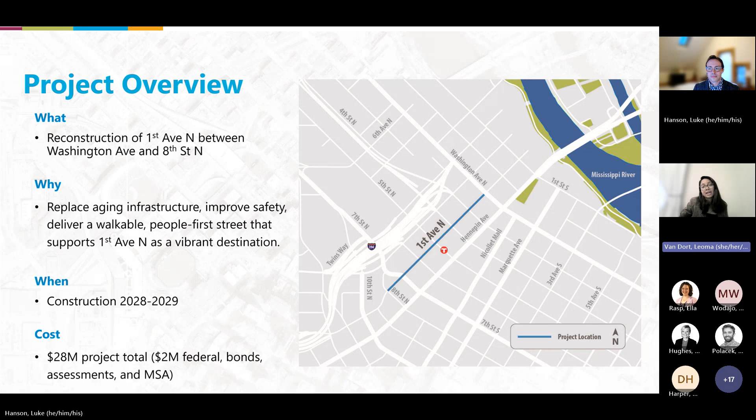Currently, the project is slated for construction in 2028 and 2029. The total project cost is $28 million that will be funded by a $2 million federal grant. This grant is for improving pedestrian facilities along First Avenue. Additionally, we will also use bonds, special assessments, and municipal state aid funds to cover the remaining cost of the project.

Today we are sharing our preferred layout with all of you ahead of bringing it to City Council for layout approval early next year. This brings us to the next step of more detailed final design that will happen all of next year through 2027. And then construction will begin in 2028 and 2029.

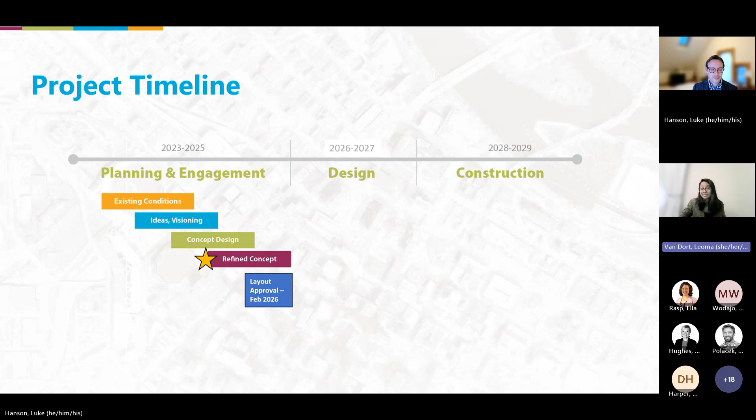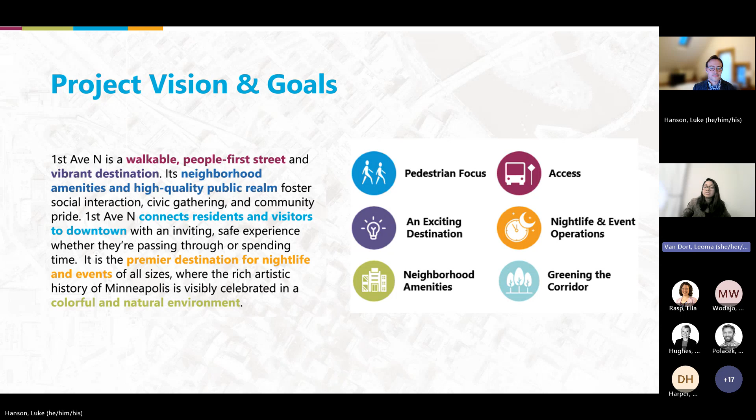In our first round of engagement, we asked the public and our stakeholders about their experience on First Avenue today and what their vision was for a future First Avenue. The feedback we received was essentially what we developed into our project goals and vision, which includes a pedestrian-focused street with amenities for people walking and rolling, a street that provides people access to many destinations on First Avenue, greening and pedestrian-friendly features, and a street that is able to support nightlife and event operations that ultimately enhance the neighborhood identity.

As I previously mentioned, we've done public engagement for nearly 2 years. We talked to people on the street, did walking tours with different groups to identify existing challenges, and talked with safety and traffic personnel to understand operational needs on the corridor. We also gathered input at open houses and online surveys, and had targeted one-on-one conversations with property and business owners along the corridor. Throughout the project, we received valuable input that ultimately informed our recommended design.

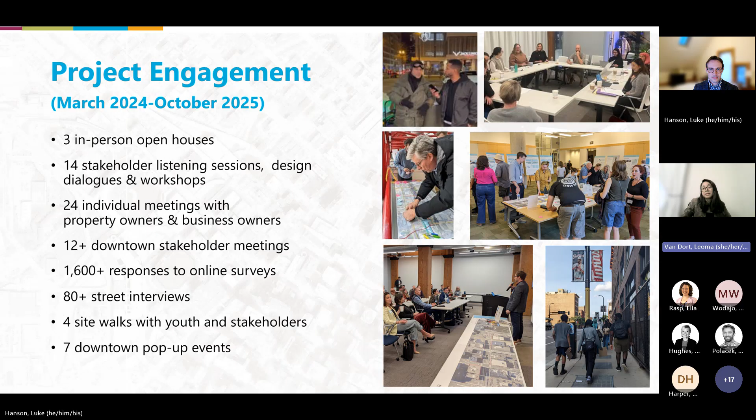The technical work we did went hand in hand with engagement over the 2 years. We looked at things like trees along the corridor, utilities and encroachments, and constraints for greening and stormwater infrastructure. We also identified where areaways were located—areaways are basically basements of buildings that extend into the right-of-way under the sidewalks. We learned that there are, in fact, many areaways on First Avenue.

In addition to all of this, we also went out on event nights to observe traffic operations, things like where passenger pickup and drop-off happens and how pedestrians use the street.

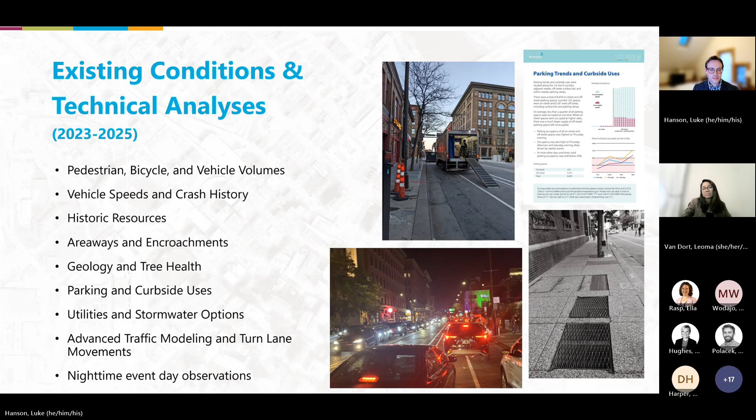All of these options aligned with city policies and plans. They incorporated operational considerations and technical analysis, and were directly informed by previous engagement. All of these options also include wider sidewalks than today, and support temporary closures for activation and events.

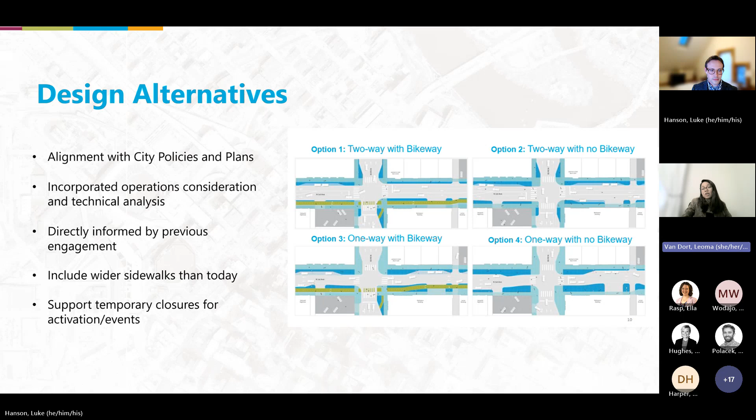I'll very quickly summarize what we heard from that 3rd phase of engagement before turning this over to Luke. From the online survey, we heard more support for the options with a bikeway. In in-person conversations, we heard mixed feedback on the options with the bikeway, and we also heard a preference for one-way. Generally, however, we did not hear a strong consensus on whether a two-way or one-way option would best serve the project goals.

What we heard at the end of phase 3 was pretty consistent with what we had heard from previous engagement as well, which was that space for pedestrian and business activities—like wider sidewalks, space for loading, drop-off, parking, outdoor dining, and greening—were top priorities.

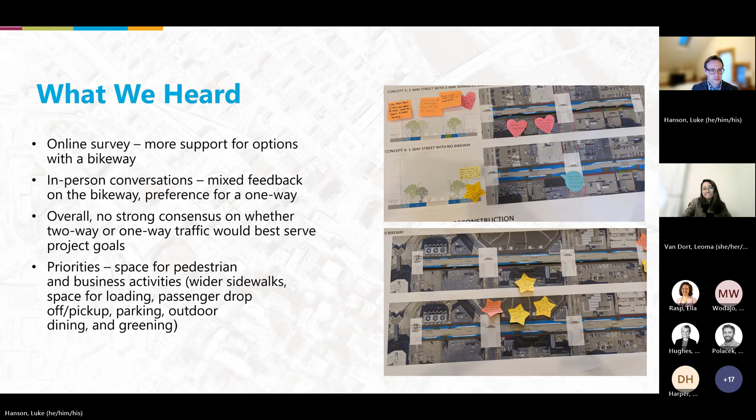So if you'd like to take a deep dive into all of the engagement feedback we've heard to date, we have our engagement summaries available on the project webpage.

And with that, I'm going to turn it over to Luke, who will walk us through some key considerations that have informed the recommended design.

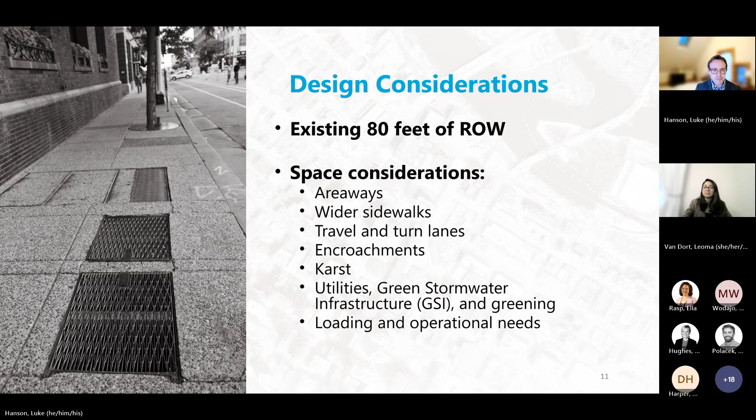Back in phase 3, when we last engaged in summer, we explored, as Leoma noted, both one-way and two-way options for the street. At a high level, part of the thinking here was not to turn First Avenue into a one-way.

That was never a design goal or objective of the project. Instead, we explored one-way options because they didn't require as many turn lanes as a two-way street. As a result, that afforded some more space behind the curb that we could potentially appropriate for other goals and objectives we were trying to accomplish with the redesign of First Avenue.

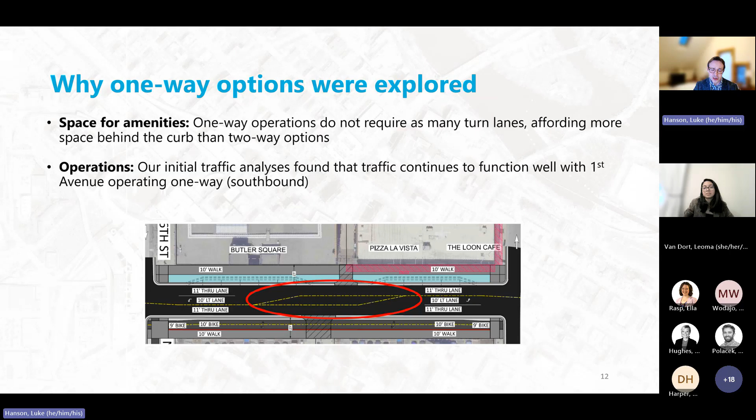And then at a really high level, we did do a traffic analysis that showed both one and two-way operations tend to function well on First.

So as we weighed those considerations in phase 3, we reviewed the feedback we received as a project team and then performed some additional technical analysis to really tease out the impact of a one versus two-way roadway for motorized traffic on First. I'll quickly summarize some key findings that were informative in terms of our ultimate thinking and recommendation for the corridor.

As I noted before, from an operational perspective, both one and two-way streets operate well, and that's not necessarily surprising. First used to operate as a one-way street, so it stands to reason that it could function again.

However, once we took a deeper dive and did some additional traffic analysis by converting First to a one-way street - as a recap, that would be a two-lane southbound one-way street - we found that approximately 100 to 200 vehicles per hour would be diverted northbound onto Hennepin.

That was a key consideration because, as we well appreciate, while our project limits are First Avenue from Washington to 8th and 9th Street on the south, First Avenue exists in a downtown network of streets and doesn't exist in a vacuum. Core to that consideration too was that diversion onto Hennepin, both in terms of traffic on the street, but also in terms of its ability to potentially impact northbound transit service. So those were key considerations.

Additionally, at a high level, we weighed and vetted some of the safety options of both one and two-way streets. Broadly speaking, one-way streets sometimes have the potential for higher speeds or merging conflicts - those merging conflicts particularly where a car wants to merge from one lane to an adjacent lane, usually to complete a turn. Whereas sometimes the friction of a two-way street can help keep traffic speeds lower. Again, these are design and context specific, but at a high level, those were considerations we weighed as a project team with respect to safety.

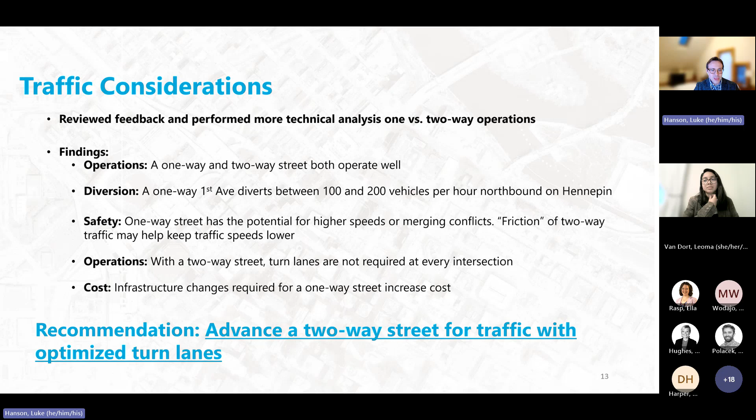Ultimately, as we sat and synthesized the feedback and technical analysis as a project team, we came to the recommendation of advancing a two-way street for motorized traffic on First Avenue, with the thinking being that we can optimize turn lanes. And I think it's important to note, what does that mean?

That means essentially, based on our traffic analysis and safety considerations, there are locations where we do not need to maintain dedicated turn lanes at every intersection. The benefit there within being we are able to then appropriate that space behind the curb for additional pedestrian amenities, space, and other goals and objectives of the project.

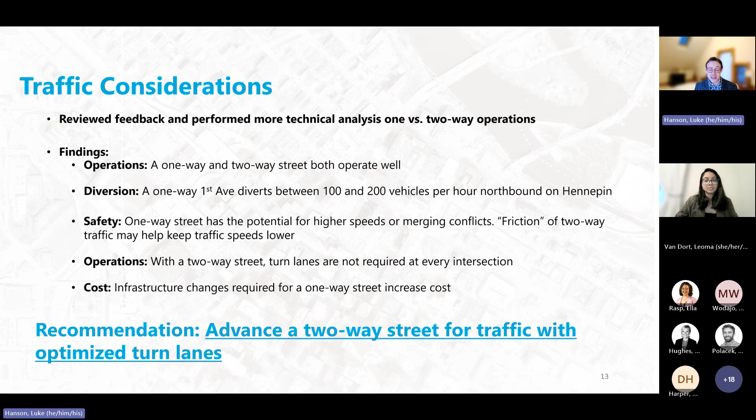Similarly, going back to our phase 3 engagement that we last interfaced with in summer of this year, we also considered options both with and without bikeways. At a really high level, just recapping years of engagement here, that is largely a function of having mixed results depending on who we were talking to through phases 1, 2, and 3 of engagement. Also at a high level, bikeways obviously take up space in the corridor, so there are impacts to what we're able to fit within the corridor, but then also there are existing bike facilities on First today.

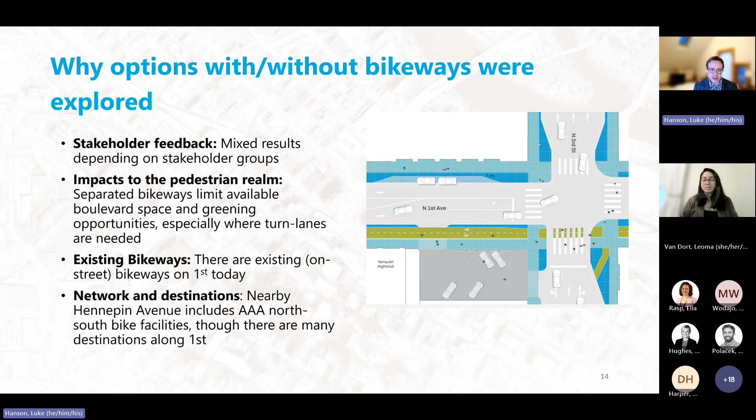Part of that consideration was, just like traffic, how are bikeways considered within the overall downtown network of existing and proposed facilities. As we took a closer look, we considered not just First Avenue's traffic implications, but how it sits in our connected and planned bikeway network, recognizing we have a parallel all ages and abilities bike facility on Hennepin Avenue that was installed when that street was recently reconstructed in both phases.

As we look at bike facilities or connectivity to First, we also have intersecting bikeways at 10th and 9th Street, which are soon to be improved with a federal project to make those safer, more comfortable, all ages and abilities facilities. There are also bike facilities that intersect First on 6th, 4th, 3rd, and Washington. Looking at our planned network over time, we have the vision of connecting every intersecting street within project limits to First Avenue with bike facilities.

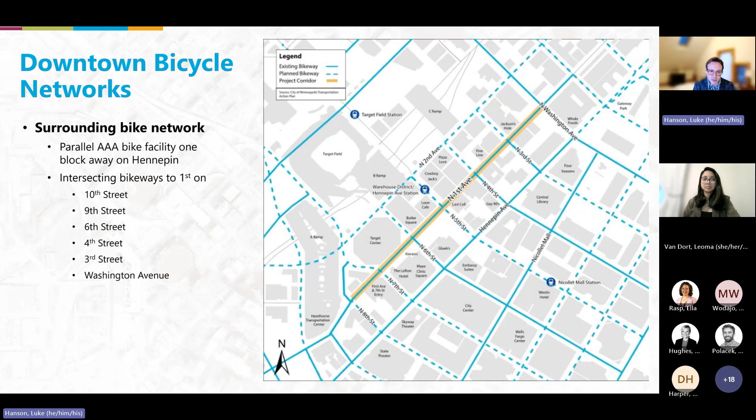Similar to our traffic considerations, following the completion of phase 3 engagement, we reviewed feedback and then explored design options both with and without bikeways to really assess how they best meet project goals on the corridor. At a high level, one-way protected bikeways on both sides of the street were not advanced, largely because they take up more space than a two-way bike facility and proved quite impactful. As a result, we did explore a two-way sidewalk level bikeway on the east, the not-Target-Center side of First Avenue within project limits.

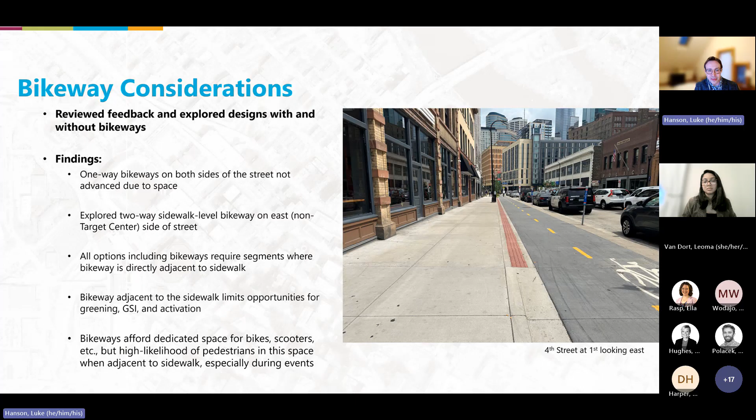An additional consideration is that bikeways afford dedicated space for bikes, scooters, and micromobility to operate, which is a good thing. That said, there's also a high likelihood of pedestrians inhabiting this space, especially where that bikeway is directly adjacent to the sidewalk, similar to this image of 4th. I think that is also amplified when we're looking at event traffic, especially for pedestrians on First. The images on the screen were taken this summer.

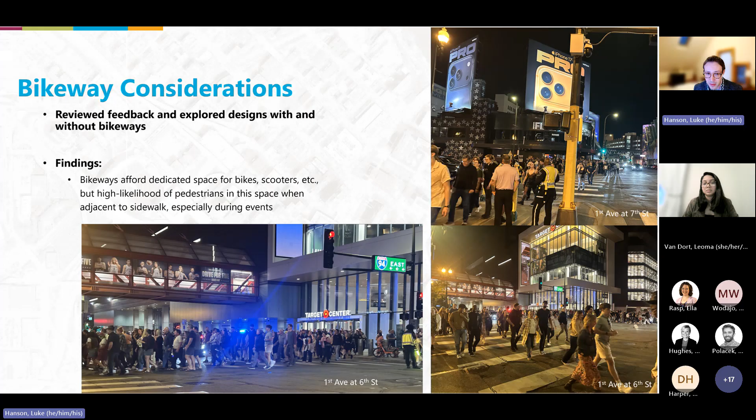As Leoma noted before, a really important component of our assessment of the corridor, as we're weighing project goals, was to visit First at various times of day during various events so we could really understand how it's being used. An important consideration is that when we have a concert at First Ave or events at Target Center or Target Field, there are so many pedestrians, especially during event traffic, there is a high likelihood of pedestrians inhabiting that bikeway space, just given how many people we're talking about on this corridor.

That said, that's not a recommendation we make lightly. The design objective of this project has to include continuing to support safe and practicable access for bikes to the many destinations along First. As a result, I think that comes with a necessary commitment to improving bikeway connections to First Avenue North.

As noted before at that bikeway network map, there are a number of existing bike facilities today, though I do think there's ample opportunity to make some targeted investments to those facilities to better support safe and practical access to the destinations along First and ensure that biking continues to be a safe and reasonable means of transportation.

Additionally, one benefit of being able to redesign First is the benefit of having functional boulevard space, which today is largely lacking along the corridor.

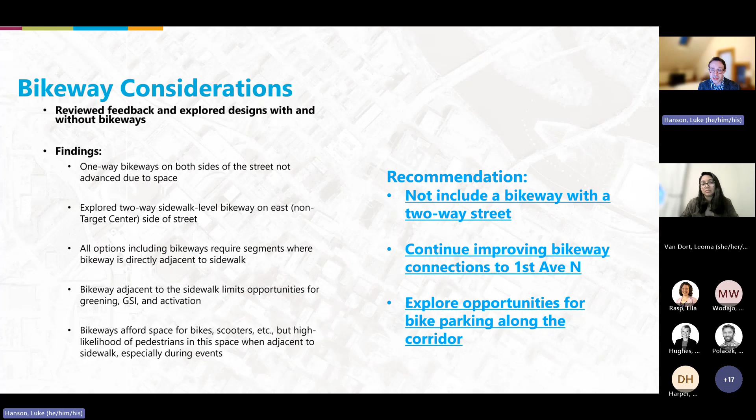With that, I think comes a really meaningful opportunity to explore bike parking along the corridor, which is pretty lacking today. This is a determination that will be finalized through final design in '26 and '27. But things we're starting to explore now are where are those opportunities behind the curb for bike parking, appreciating that this can still support biking as a transportation option that is safe and meets our all ages and abilities expectations. And then also looking at potential opportunities for things like protected bike parking if we want to store bikes longer term.

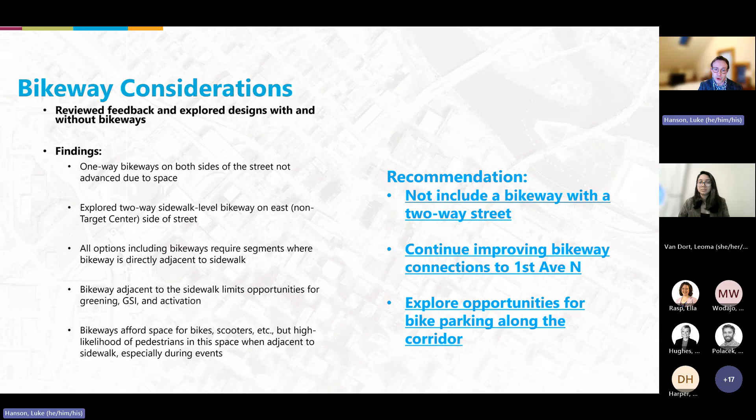So ultimately, that leads us to our recommended design, which at a high level is a safer pedestrian-focused street. This includes much wider sidewalks than exist today. That is something we're really excited to be able to deliver, given that that is such an important component of First and is sorely lacking today.

This also includes a design with dedicated boulevard space, which we also lack today, that then affords the opportunity for things like greening, utilities that aren't in the sidewalk like they are today, green stormwater infrastructure, the potential for trees, and also additional things like potential activation, or as mentioned before, maybe opportunities for bike parking.

This also results in a street where we can accommodate the necessary loading and drop-off needs along the corridor. And with a corridor that's as diverse as First, that includes things like Target Center, First Ave, also Butler Square, Fine Line, the loading and drop-off needs vary considerably from block to block. As a result, we're able to arrive at a cross-section that meets those necessary loading drop-off needs, which are quite varied along the corridor.

Additionally, this recommended design will continue to support events, street closures, outdoor dining and programming, but hopefully it does so in a way that it functions much better than today, especially because we're able to arrive at a design that substantially narrows the street and affords much more space behind the curb for programming.

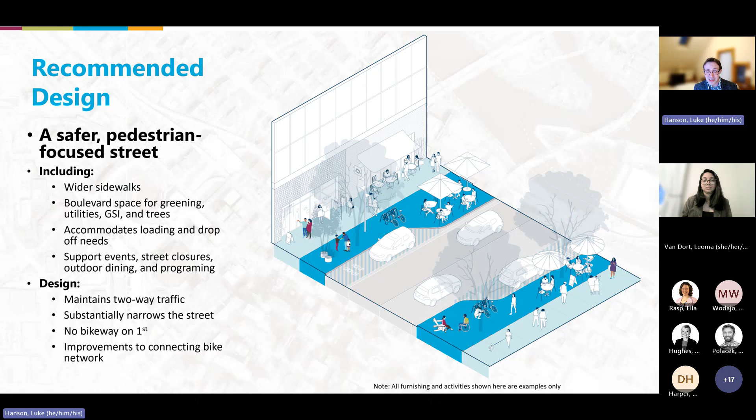So again, at a design level, this recommendation includes two-way traffic on the street, though it is substantially narrower than today, and also should result in a traffic calmed, safer street for everyone using that facility. Again, it doesn't include a bikeway on the corridor itself, however, I think comes with a necessary commitment to improving connecting bike facilities to First, again, to support that as a meaningful and safe means of transportation along the corridor.

So now to round out this portion of our presentation, we have a couple of just high-level conceptual images that show how this recommended design translates to the corridor today. These are just representative cross-sections, and important to note, this is largely communicating the different appropriation of space. This isn't final design. We still have years of design work to ultimately land at where all these features go.

Though in this image at First and 3rd Street North, we can see we have a substantially narrower street with narrower crossing distances and hopefully a traffic calm street. What this affords is boulevard space where we can house utilities, infrastructure, trees, greening, and that doesn't have to compete for space with wider sidewalks as it does today.

Another example here is the intersection of First and Fifth, where again, you can hopefully, at least in this image, see a very different cross-section communicated to the street. And then similarly to the intersection of 1st and 7th, where again, we're able to afford much more space behind the curb than exists today.

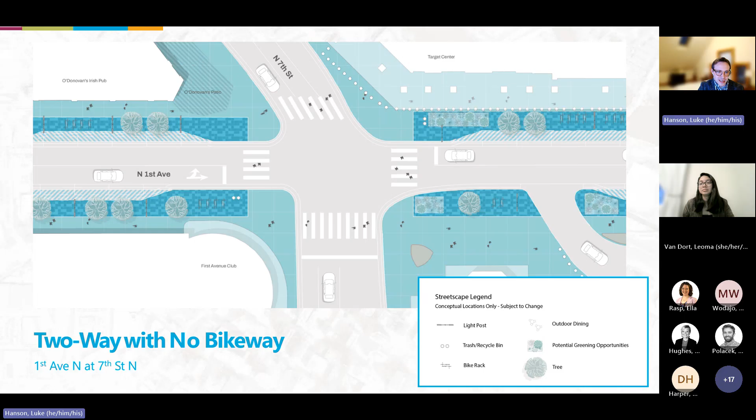One other interesting piece is these 2D images I feel like don't necessarily capture the magnitude of difference in terms of cross-section. So we also have a couple of GIFs, and I hope these work for us tonight. But more than anything, this is 1st Avenue at 5th Street looking northbound. And this isn't intended to communicate final design or aesthetics, but rather the difference in curb line and the appropriation of space with this recommendation.

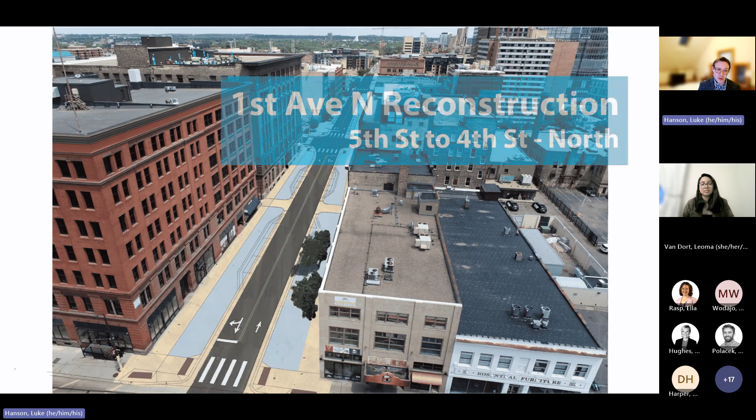And I hope what is at least being communicated here is this is a substantially narrower street with much more space available for people walking, people rolling, other uses, activation behind the curb that just frankly isn't an option today.

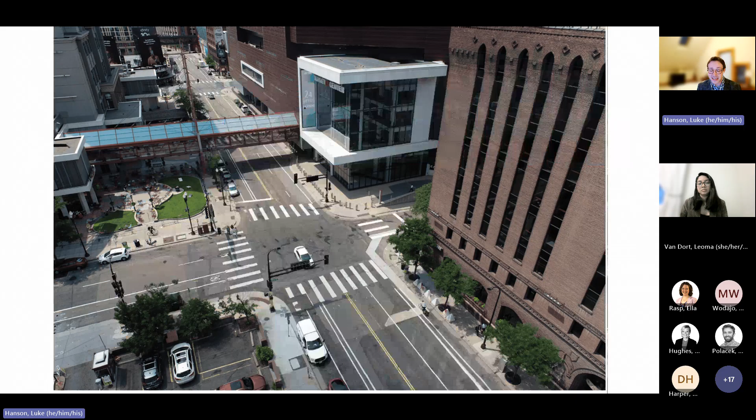Here's another view looking southbound at 6th Street at Target Center. As I let this GIF roll back and forth between existing conditions and proposed, I hope what's being communicated is how much additional space we're providing behind the curb. At a location like 6th Street, that's critically important because we typically see pedestrian traffic, especially during events, spilling over into the street. There's a clear demonstrated need to carve out more space for pedestrian queuing, especially during events, and we're excited to deliver that with this recommendation.

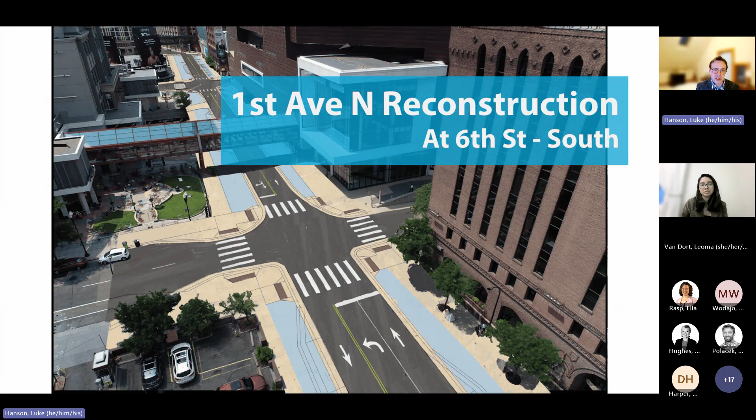So in summary, our recommendation is for a safer, pedestrian-focused 1st Avenue, a street that includes much wider sidewalks than we have today. A narrower, safer street, especially for people walking, that narrows crossing distances and should hopefully improve safety in a meaningful way. We have a street where we're able to carve out real boulevards to support infrastructure, including greening, green stormwater infrastructure, trees, utilities, light poles, bike parking, and a design that continues to support the necessary operational needs of the corridor, which vary considerably depending on the block. Ultimately, this is a street that continues to accommodate events, potential programming or street closures, and hopefully does so in a way that is better than today by virtue of a much more pedestrian-friendly and focused design.